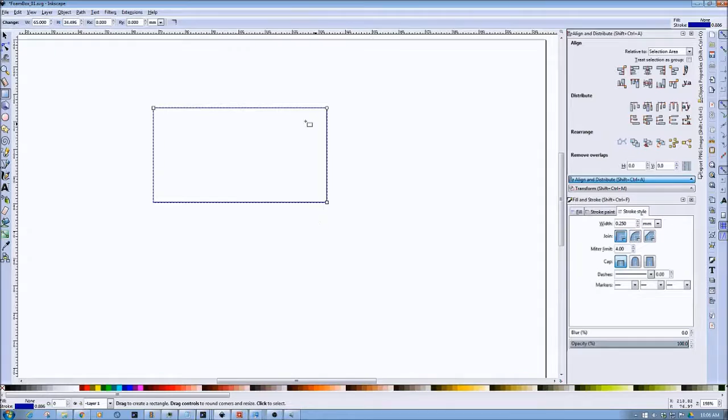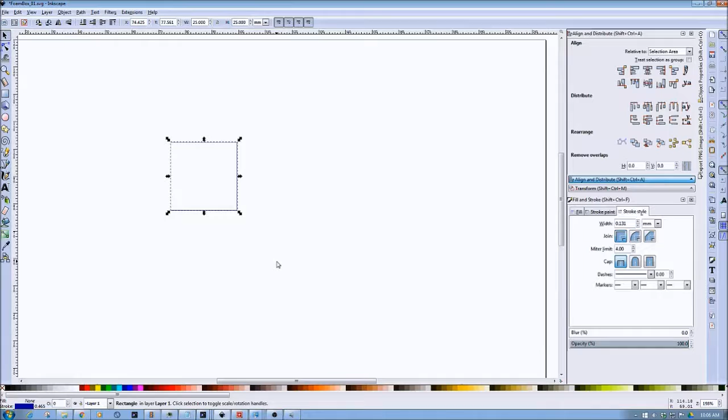So we're going to start with a box, and since the tubes are about 19 millimeters in diameter, I'm going to start out with a 25 by 25 box as my basis, and then I'm going to set the tubes in there. So basically what I'm going to do is now create, let's see, let's make this 19.5. We'll give a little bit of leeway in there. So 19.5, 19.5, and then we will center our circle in there.

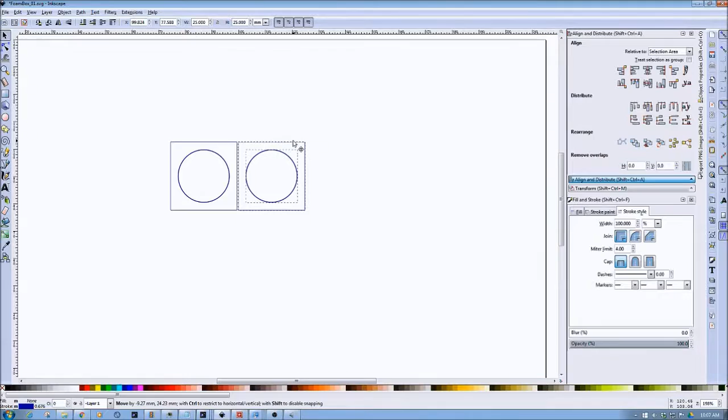Also, I want to knock this circle down widthwise to 0.25 millimeter line thickness, so it matches the other ones. And then I am going to clone this, so I am going to have two of these. And then just to make sure I've got these, whoops, didn't want to do that. So I just want to do the boxes. Let's see if I get lucky and union works. It does. So basically I just kind of cheated to do the circle alignment. There's a couple different ways we could have done that, but that was the quickest and the easiest.

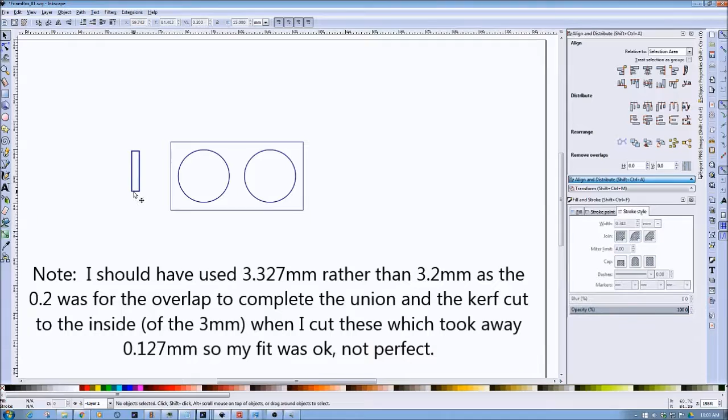So now we need to create some tabs. As I mentioned at the onset, I'm going to be doing it out of 3 millimeter acrylic. So I'm going to set this for 3.2 millimeters width, and then for the height I'm going to have a tab length of 15. I kind of keep going back, and there's probably a way to set this that I just don't know off the top of my head. But the line size, the narrower I found pretty much the better.

So basically, we want to overlap this a little bit, and then duplicate this, put it on the other side, and overlap that a little bit. Now let's select these three objects, and alignment is just so handy. Then we go up here, create a union, and now we have our tab pieces. Now you'll notice we have not removed the circles yet with difference on the top two, because we're going to copy this, since we need two of these.

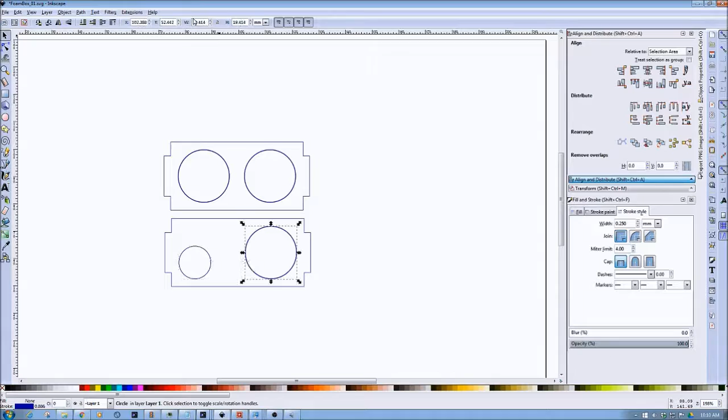So we create one down here, and now we need to change this diameter from 19.5 to around 12.1. As I make the change here, I'll explain. So 12.1, and this one will become, I guess I could have just copied, 12.1, and then 12.1. Now the logic here is this will allow the pins of the tube to pass through the base, but the bottom of the tube will rest upon the plexiglass cutout.

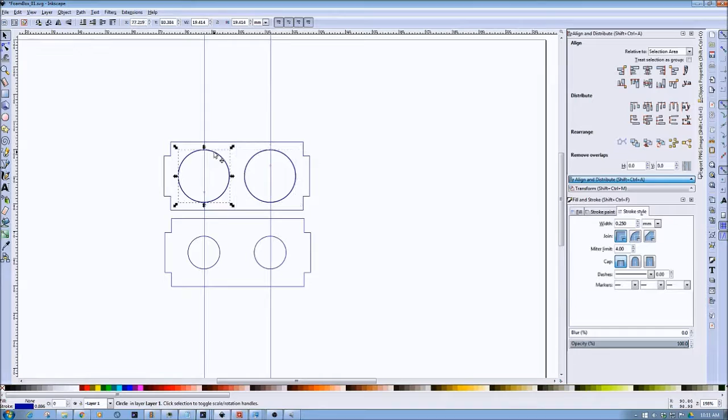So we need to now realign this to the center. Whoops, would help if we do this. So we've now aligned this to the center, and let's cheat a little bit and bring this back. Since we have this in the center, let's bring another grid line over here, and move this to the center. Okay, so we now have these two pieces. I'm going to still hold off. Let me just double check. Yeah, that's pretty close for government work. We've left a little bit of slop in there, so that's okay.

So now we have our top and bottoms, and what we need to create now is our sides. Remember, we did this as a 25 millimeter square, so we need to start with another 25 millimeter square, and I want to think about how I'm going to do this. Let me move this over a little bit. You'll notice I go back to a square, because this helps me get my thoughts together on how to design this. Because these are going to be clones of one another, we only have to really create one. So lining these up is really critical.

Now we need to think a little bit how tall we want this. The tube itself is about 40 millimeters from top to pin bottom. Not the very top where it's tied off, but the top of the tube to the bottom is 40 millimeters. So let's make this piece about 50 millimeters tall.

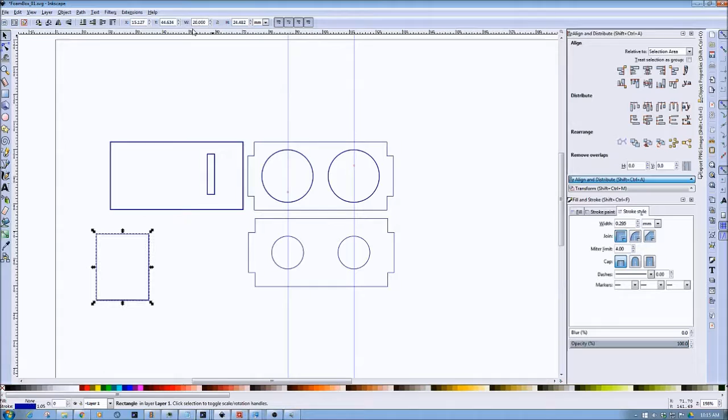So the body of the tube is about 20 millimeters. So I think for aesthetics, I'm going to make it about 20 millimeters separation. So I am going to create another box for reference, and I'm going to say width 20. This is my reference. I'll delete it when I'm finished, actually.

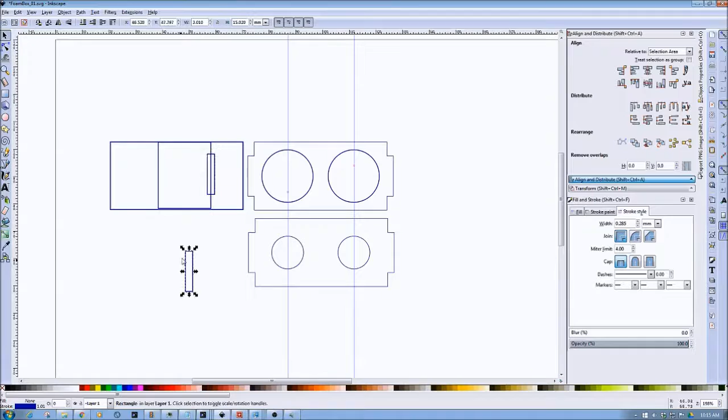So let's scooch this over. So basically in Inkscape I'm using Alt arrow to do a fine move, and then what I'm going to do is copy paste this guy, and again line them up.

So again, poor man's. I could use a ruler, I could have done a couple other things, but I work in a lot of different applications, and this is probably a little trick. Rather than remembering the rulers and measuring things for each different one, using structure such as this to cheat makes life quite a bit easier. So we'll do that, and now the only thing we have to really do is center these objects. So now you can kind of see the layout taking place here.

Now one of the things I do want to do is go back to make this 0.25, and then make these 0.25, and then this one 0.25, just for unity. Okay, so we could just now cut this out, copy this over, and almost say it's done, but it's a little bit lacking. It's a little bit cold, so let's aesthetic this guy up a little bit, and let's do a circle here.

So let's do a 20 millimeter. Make sure I got the right things going on here. So do another 20, and boom. And then I'm just going to take this circle up here and line this up with this base. And again, I'm going to just do an alignment centered, and then boom. Alright, so that looks good, doesn't it? Hopefully you can see what I'm going to be getting at here in a second.

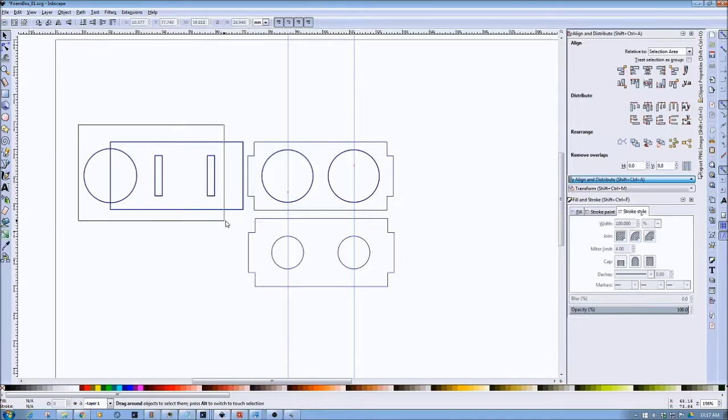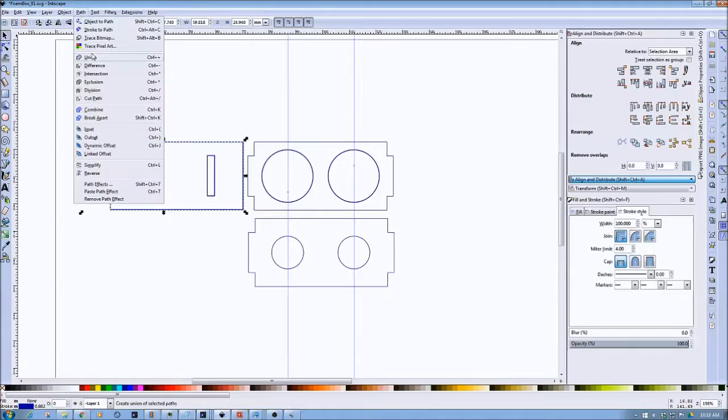So if I do this, and then I do path, and then I say difference, I think that's what I want. Nope, that didn't work. Why isn't that working? So if I take this, so that's the difference, alright, and then if I take this, and then go over to path and do difference. Okay, so now I should have a hole here.

Let me think just a quick second if I want to do anything more aesthetic. Whoops, apparently that didn't cut those pieces out because that didn't come along with it. So let me do this and go back here, cut path, nope, that's not what I wanted. And so if I go and do path difference, alright, let's see if that worked. I think that did. Alright, that did.

So basically we're just going to put this down here. So we now have our two sides, and we have our top, and we have our bottom. I'm just trying to think, do we want to do anything more aesthetic here? I don't think so. I think we'll just give this a run and see how this prints out.